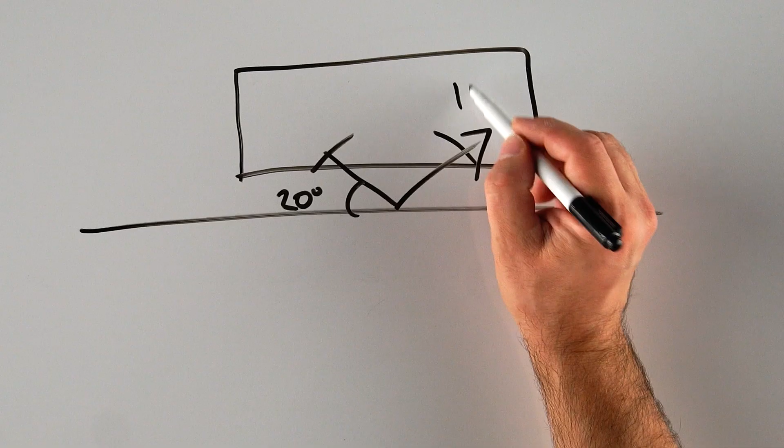If the resulting beam comes back at 20 degrees, which it won't, you've got 100 gloss units. That's perfect gloss, which you're never ever going to achieve. A new car will have 90-ish. If it's presented well and looked after well, it'll have about 90. And with a good paint correction method, you can get it up to 95. I think the most we've ever achieved is 95 or 96.

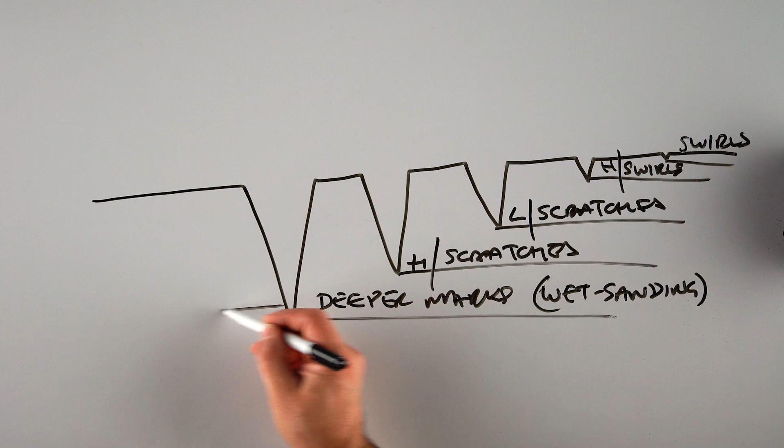Now, paintwork correction. So you've got your different levels of scratches. They're different depths. These are your swirls, these are your heavy swirls, these are your light scratches, your heavy scratches, and these are either deeper marks that require very aggressive methods to remove, such as wet sanding, or they're not removable, they're down to undercoat. If your undercoat's here and it's gone down below the undercoat, forget it. It's still worth correcting. You want to round off this edge and this edge so that it's not as noticeable.

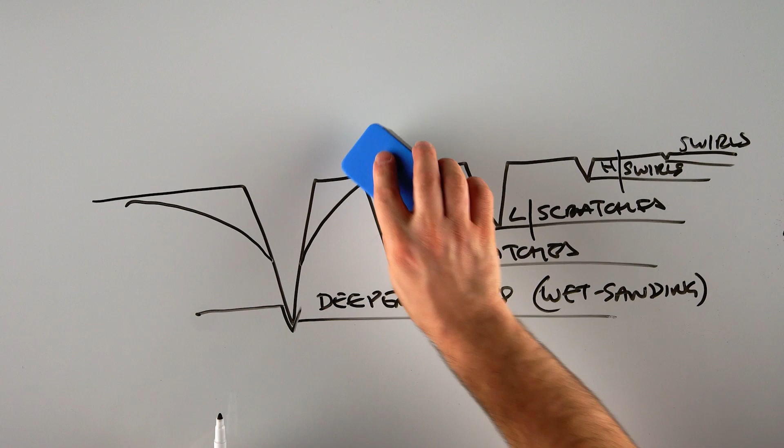And as a result, you won't see it as much and it will look better and the customer will be happy. Before you do the job, and this takes a bit of experience, you want to understand which imperfections there are and how many there are per panel. And usually they're at least consistent. So the whole car will have this type and this type, but they're generally consistent across the vehicle, unless there's a painted panel or something like that.

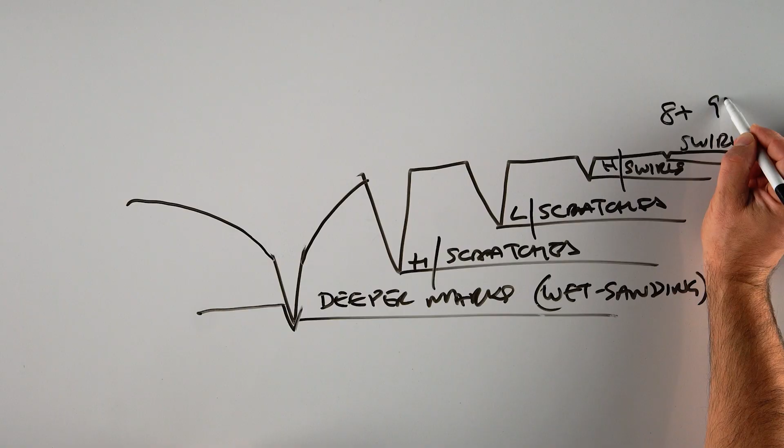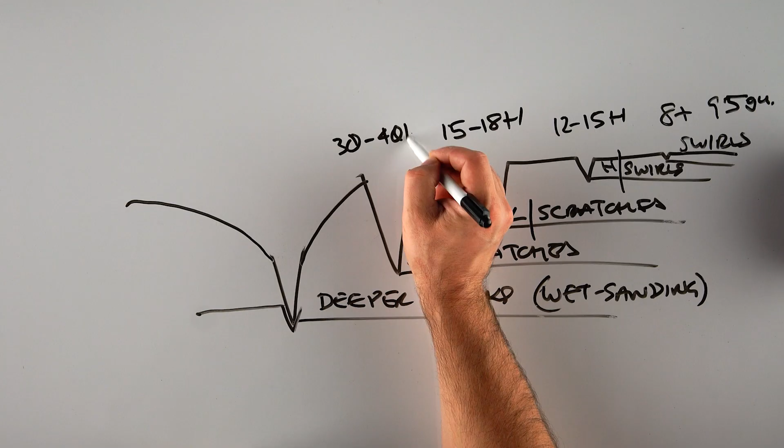Now we know that it takes just over 8 hours to remove swirls from a car properly and have a really nice 95 gloss unit finish. It takes 12 to 15 hours to remove heavy swirling and or light scratches, about 15 to 18 hours to remove light scratches, and about 30 to 40 hours to remove heavy scratches.

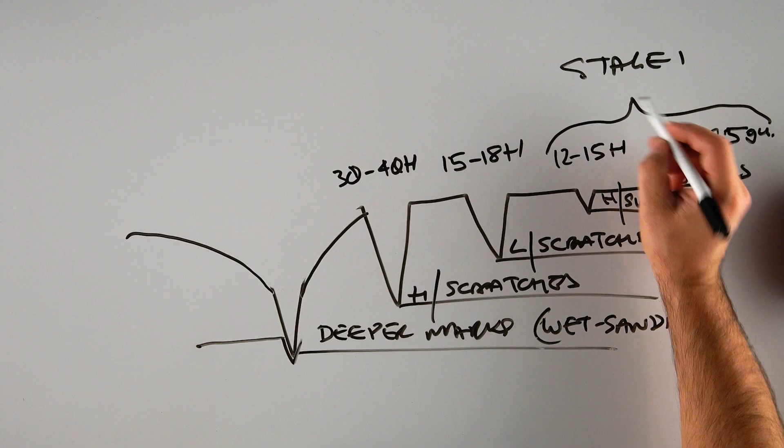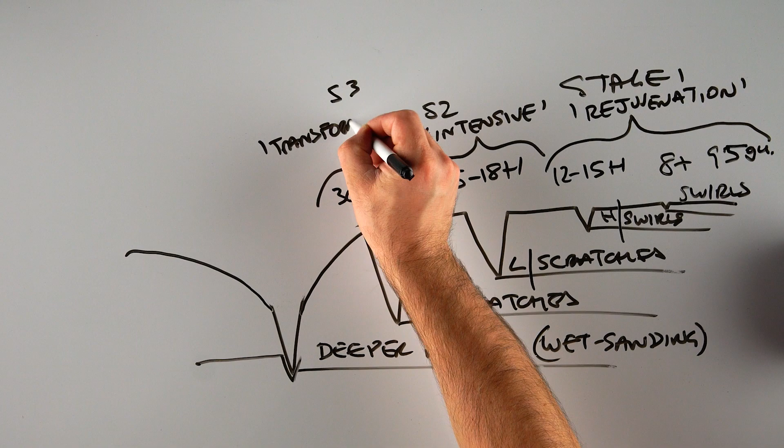This is what we'd call a stage 1 detail, and we used to call it, kind of still do, rejuvenation. This is what we'd call a stage 2 or intensive, and this is what we'd call a stage 3 or a transformation. Sorry, these are the detail services, and the paint correction is part of that and is most of that detail service. And when we say this, we mean all of this is a 95 gloss unit result. That's what we're heading for, and usually we come pretty close to it. It's always between 92 and 95 gloss units.

It doesn't matter how bad it started out, it just matters how much time you're putting into it to achieve that finish. A new car can come up to 95 gloss units, a heavily used 20-year-old work ute can come up to 95 gloss units. It just needs more time. The reason for this discrepancy is car size and paint type.

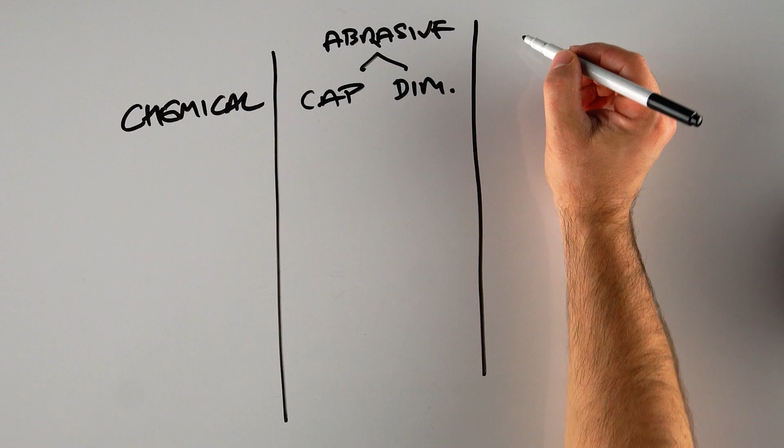Okay, now polish choice. You have chemical polishers, abrasive polishers, of which there are generally cap technology and diminishing abrasive. And you've got your glazes. You've then got hybrids, which are a mixture of all three. Chemical polishers are completely useless in my opinion. They're not permanent, they clean the surface. I don't even think they should be called a polish, but they exist, they are called polishers, look out for them.

Now glazes, and we do have one glaze, it's Dark Matter. Dark Matter is a hybrid, it has some protection in it. Not all glazes have protection. It has some abrasives in it, they're the diminishing type. It has some cleaners in it. They're very, very light. And it has what we call color charged glazes.

Now Dark Matter does its job by cleaning the surface very lightly, and then if you're using Dark Matter with a machine, the abrasives will move around. They're very, very fine abrasives. They're what you'll find in our ultra fine jeweling compound. They're the diminishing type, so they haven't got much bite to them, but they're the type to gloss up a surface significantly. That's what they're there for.

It adds some color charge glazes, so anything like red, anything that's a darker color, it will really give you that depth of color, that nice thick look and jelly look to it, and it has a little protection. Glazes, including Dark Matter, we would recommend only for show cars. They just don't have a lot of protection. Or we'd recommend them over a much more durable or higher performing protection.

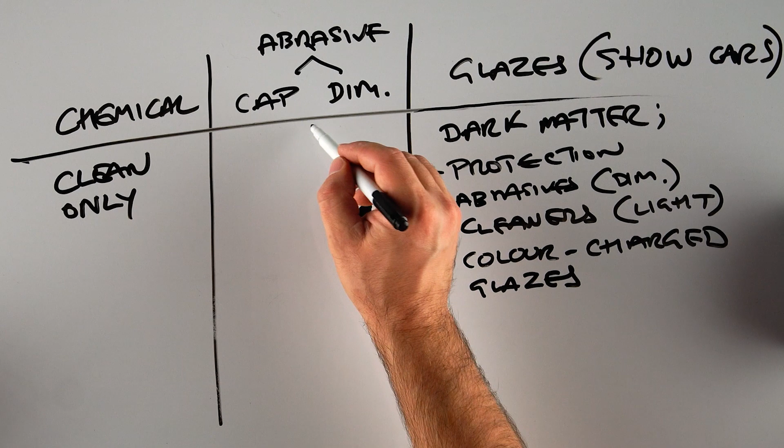Now, diminishing polishes, they can be this shape or this shape. Usually when I see them, they're this shape. The edges of the abrasive do the cutting and then they round off and they become spent after a certain amount of working time. Diminishing abrasives start cutting at whatever level they're cutting and they continue to cut at that level until they're finished.

To help you better understand the way polishes work and abrasives work, think of them like sandpaper. They're similar in the sense, except that polish has the abrasives, which are much finer, suspended in liquid instead of glued to a sheet of paper. And instead of rubbing that paper along the surface, you're applying it to a buffing pad and agitating it.

Diminishing abrasives are a lot like sandpaper in that sense. They have a grit level, P6000 equivalent or something like that, and they will cut and finish at that level and only that level. Now your cap polishes or clustered abrasive polish will have abrasives that are clustered in groups. They kind of huddle together.

These act as one big abrasive, which can be anywhere between 2 to 5 times the size of your diminishing abrasives. They then break down into smaller particles, similar in size to the diminishing particles. So they don't behave like a sandpaper. They may start cutting at a P2000 grit level and finish up at a P4000 grit.

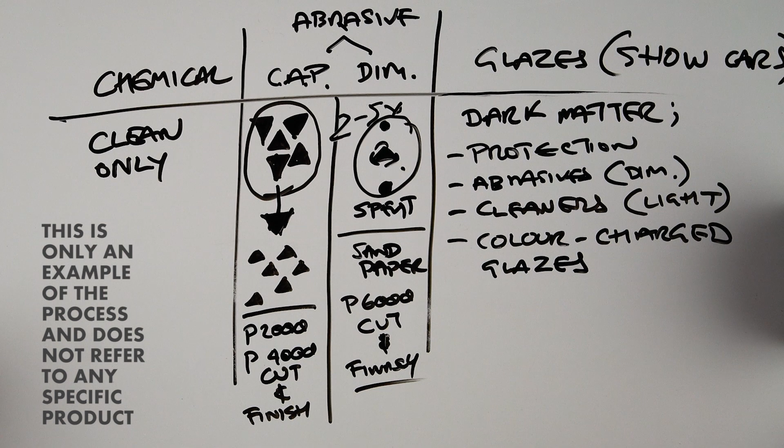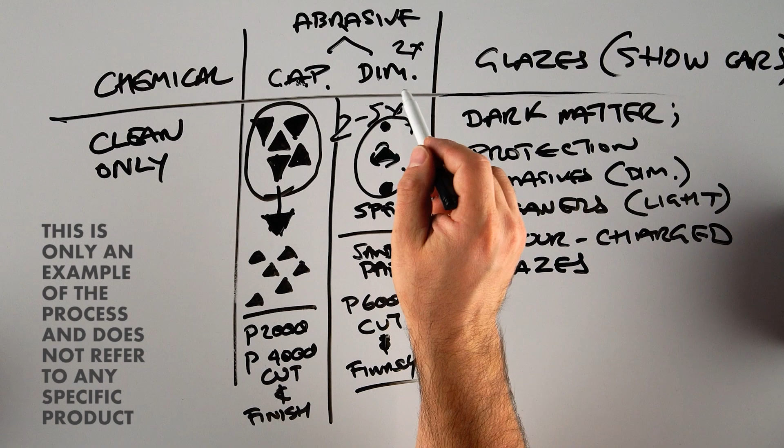Being able to cut at one level and refine down to another level is hugely efficient. The cost saving and the amount of extra correction you can do in any given time is significantly greater than the diminishing abrasive. This technology, in my opinion, is worth twice the price of the diminishing abrasive. I wouldn't even bother to use diminishing abrasive now that this technology exists.

Also with your polishes, some abrasives are soft and some abrasives are hard. Hard abrasives are an issue when you have some dusting and you have some abrasives that have been ejected from the pad and they're sitting on top of the surface.

If you've ever removed polish from soft paint and you've noticed that the cloth has marred it, you've grabbed another cloth and you've tried different cloths and you're sure that cloth is clean and soft and it keeps marring, or you've got that surface fine and you've wiped it and it looks fine, but then on another panel you've wiped it again and you start to see some marring, that could be, and most likely is, hard abrasives. And you want to switch to a polish with soft abrasives, especially if you're polishing soft paintwork.

Another issue with usually cheap polishes is softening, chemical softening. When you remove those imperfections, they're only partially removed. It looks completely removed, but some of that is temporary. What's happening here is the chemical is softening the paint. The abrasives are doing much more cutting because the paint's much softer, and then there's some suck back.

When you get that suck back, some of those imperfections come back, and it is the absolute most inefficient way to polish. It costs an absolute fortune. You have to go around the car, then come back and go around the car again. If you're using that same polish to go around the car again, you might even have to do it a third time. Now, pad choice.

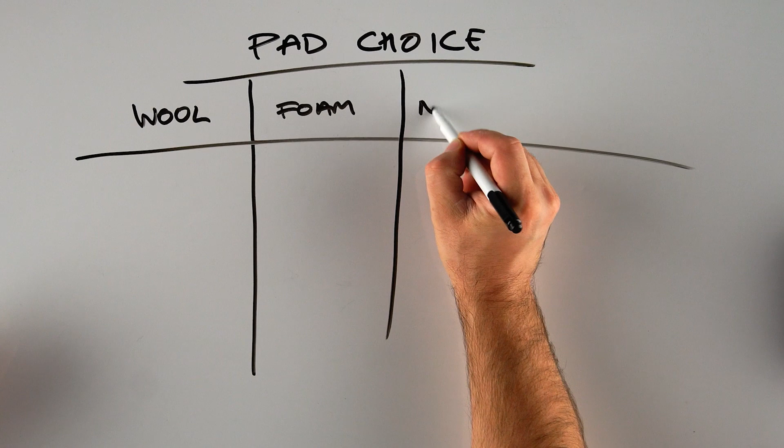We will soon be offering an extended range of pads. We'll start at wool, which is new for us, foam, nanofiber or microfiber, and orange peel reduction, or OPR for short. Now each pad has its own characteristics and offers its own level of cut and finish.

I've listed these three from the heaviest cutting to the finest, but you don't necessarily choose them for that one characteristic. There's a bunch of characteristics they have, and you'd make that choice based on the application. Whatever that paint type and the imperfections that are in that paint calls for, that's what you would choose. And you would choose a pad that works well with your polish. They have to work well together with your polish. We do a lot of testing to make sure our polishes are compatible with these material types.

Now, there are pros and cons to each. The pro to wool is very fast cutting. The con to wool is low gloss in general. Another pro is low temp levels in general. They clean very efficiently, they wash clean very quickly, and they dry very, very quickly.

They can be dirty. They tend to drop fibers more than nanofiber, and foam, if you look after foam, is very, very clean. Some people, I haven't come across many, but I did come across two who are just allergic to wool, which is a bummer. We'll have wool pads soon, and they're exciting.

The old school wool pads had fibers with little hooks on them, and just recently Australian Wool has come through with a technology where they deburr the hooks off it, so it's just nice clean fibre, and this is what's transformed a fibre that is completely useless for detailing and something we haven't used since the 90s and only on the cheapest cars, to something that we're absolutely going to use very, very soon, as we're finished with testing.

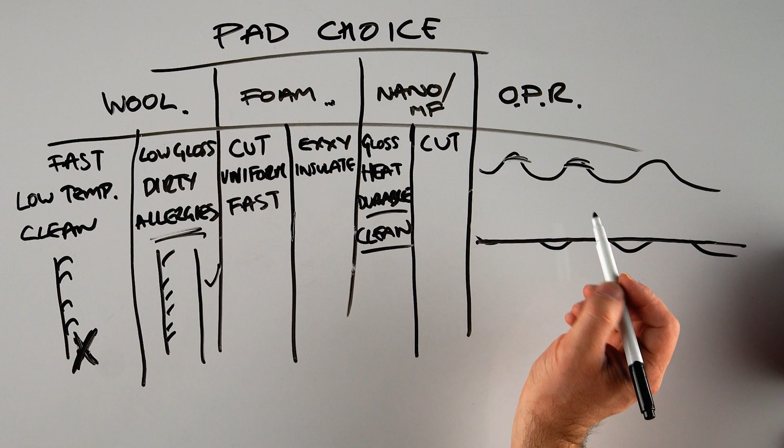What the OPR pad does is it just kind of knocks the tops off a little bit gradually. Then you can have a look at your peel, and you can start to take it off and start to taper and taper and taper until you get the amount of peel, and you still have peel, but the amount of peel that you want to match other panels. Or if you just simply wanted to reduce the peel a bit, but you still wanted some peel.

Peel is not an issue or a side effect of bad painting or anything. Peel is dialed in by manufacturers, and peel looks nice and it suits certain shapes and colors and things. These finishes are subjective. You can have one or the other. You either like this or you like that, and there are pros and cons to each.

Okay, machine choice. People spend forever talking about which machine they're going to use, and it is important, I get it. We agree it's important, so important we're going to release a whole range of machines soon.

Okay, rotary. This is still just my favourite. There's something about a rotary polisher that just still wins, and unfortunately it requires huge skill. I've said it before, but I'll mention it because it's really appropriate for this video. The rotary polisher unfortunately requires a lot of skill, but fortunately gives you all the feedback. It teaches you to be a good detailer. It will give you the most amount of accessory options.

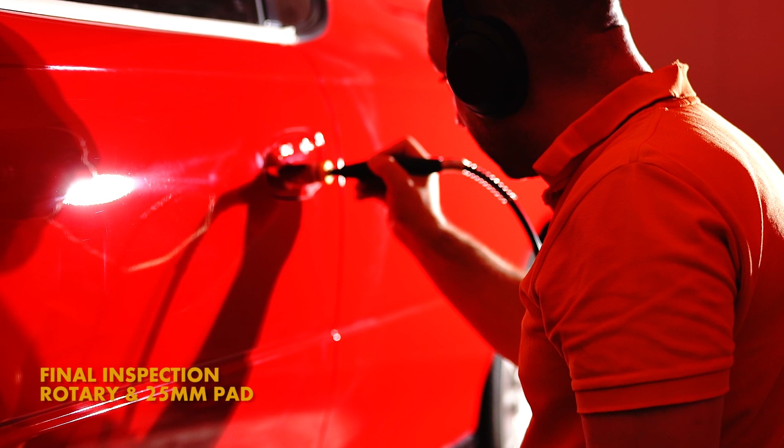It is the tool for a professional detailer, and if you're a professional detailer and don't own a rotary polisher, you must get one. You can own these too, they're good and they're getting better all the time, but you really do have to have a rotary polisher and learn to use it. It will make your jobs faster. Yes, it has more risk, but these are also risky, especially these big ones.

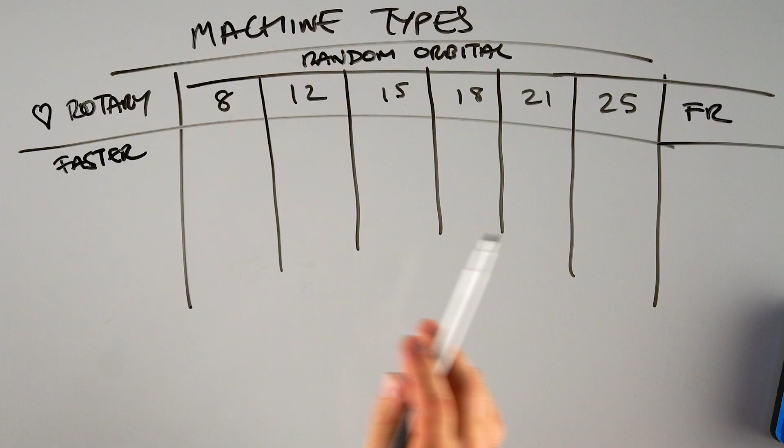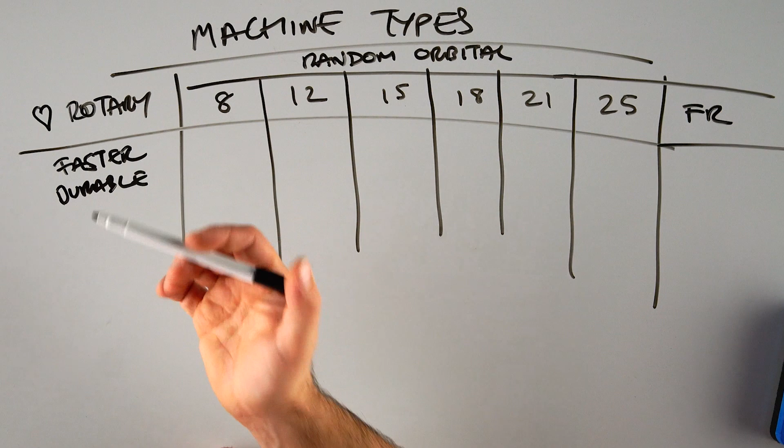A lot of people are using 21mm throw random orbits. They're actually quite risky. Not much less risky than a rotary polisher, and if you really learn to use a rotary polisher properly, it's as risky as a long throw random orbit. Get a rotary polisher. Rotary polishers are durable. They're simple machines. A simpler machine is just going to be more durable.

They have more power. Now this translates to it being faster sometimes, but it also translates to a smoother rotation, which in turn yields a better finish. If the machine's not bogging down, or it's not catching, or it's just simply smoother, it's going to give you a nicer finish. They're usually lighter and more compact. The rotary polisher we're working on is much lighter and much more compact than a long throw, and it's going to last longer and it's going to be a little cheaper.

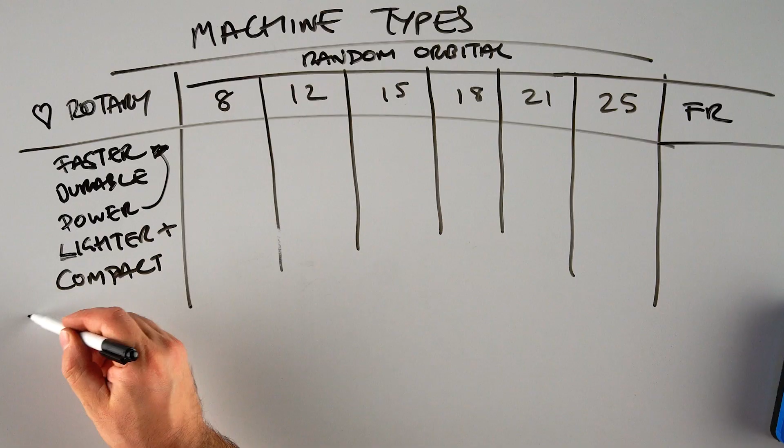Also, and this is a big one, finish quality. On some paints, and yes it is very few, the Ferrari F40 that we do at least once every 2 years is a perfect example of this. It finishes up best. Statistically we get the most gloss out of that paintwork when we use a rotary to finish. If we use any one of these type of machines, we get less gloss than with a rotary. We've tried every different pad type, every different pad and polish combination. If we use a rotary, we just simply get more gloss, we get a better finish.

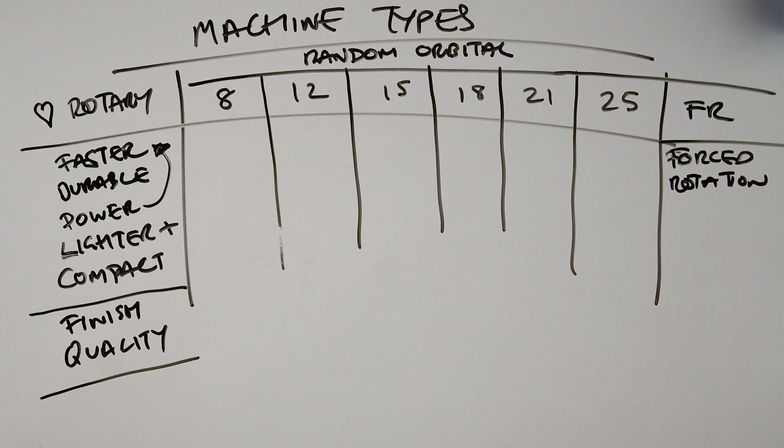Now there's forced rotation. If I'm correct, forced rotation is a technology owned by Festool, and I think they allow Bosch to use it. I could be wrong, I'm not going to go too much into that. I definitely don't want to mislead people if that's not the case. Forced rotation is slightly different to the way a random orbit works.

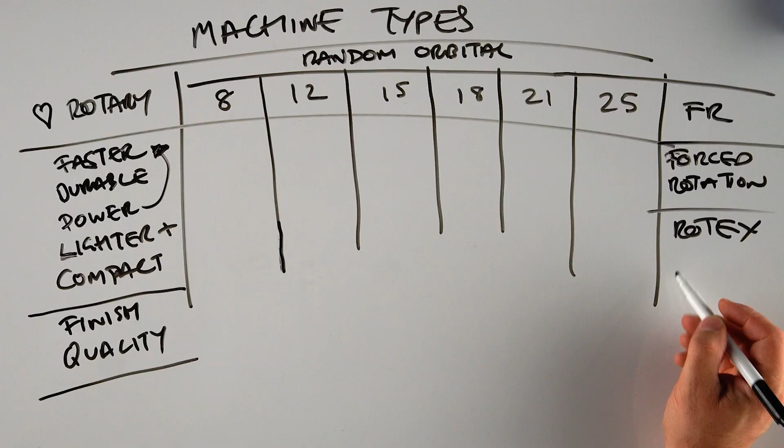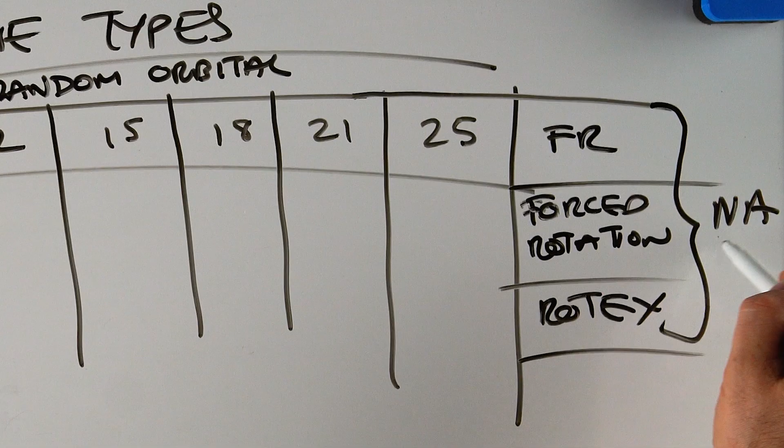The machines we used to use were called Rotex. We no longer use our Festool Rotex anymore. They were great for a good 15-year period. We used nothing but Rotex for a specific type of work. They didn't get much use, but when they were called in for duty, they just had this bright niche that only the forced rotation machines could do, but they're no longer necessary, and I wouldn't recommend them for detailing use anymore. Quite expensive too. Great for sanding, no longer required for detailing in my opinion.

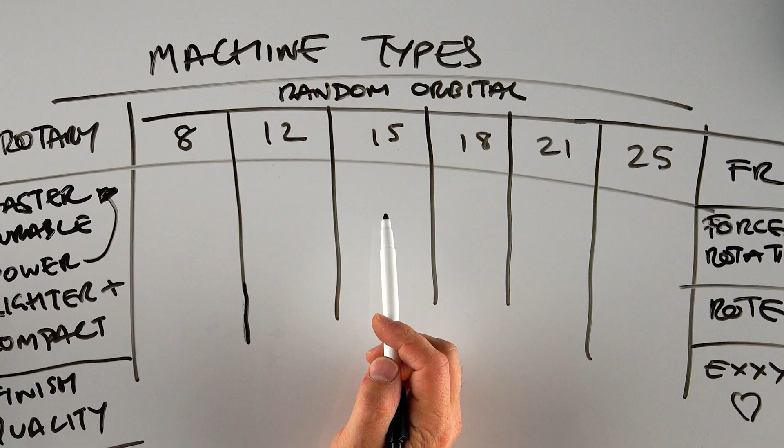Okay, now random orbit, which is what most enthusiasts are using, and most professional detailers have at least one. Everybody seems to think that the longer the throw, the better the machine is, but that's not the case. The longer the throw, the more risky the machine is.

The longer the throw, the less detailed work you can do. If this is your backing plate, but it's going to come out to here, let's say the longest throw that we have, 25mm, and you're polishing a rounded door handle. With a rotary polisher, and this is one of the pros, this line here, the top of the pad, is going to continue on, and you can get a very, very straight edge with a rotary polisher.

And you can also do this type of work with an 8mm orbit machine like the Velvet Revolver. It's perfectly suited to this kind of work. You can get close enough, and the Velvet Revolver is clutched, and it's a very, very forgiving machine, so as long as you've masked this section, you're able to go right up to that door handle and buff along it.

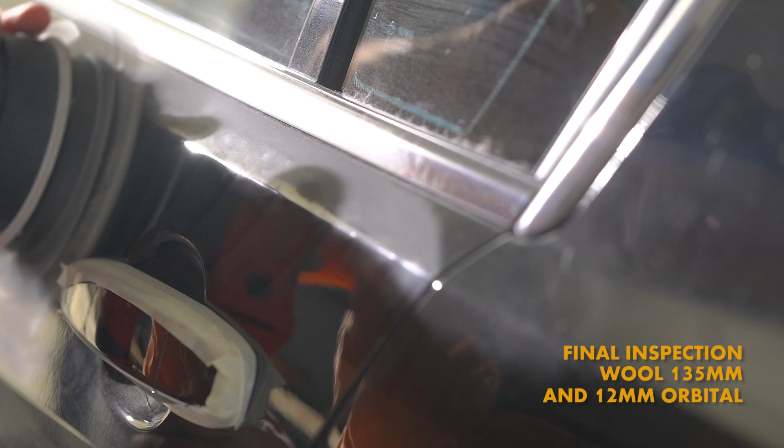You cannot do that with a 25 or 21 or even an 18mm machine. It will just smash into that door handle every time, and there's the risk of the backing plate hitting it, or as that pad moves up, it'll just dig into that section, and you've got the edge of the foam, which is the unlubricated edge, rubbing against that door handle. It's just not the way to do a job.

If you've only got one machine and it's a long throw machine, there's a lot of the car that you're not going to get done properly, and that's not detailing. Detailing is detailing all the little details. You have to get in all the little nooks and crannies, so you really need one of these first before you get one of these. If you want all of them, that's great if you've got the budget. If you want one of them, get the 8mm first. Don't go to the big throw machine and think, well, that'll do everything.

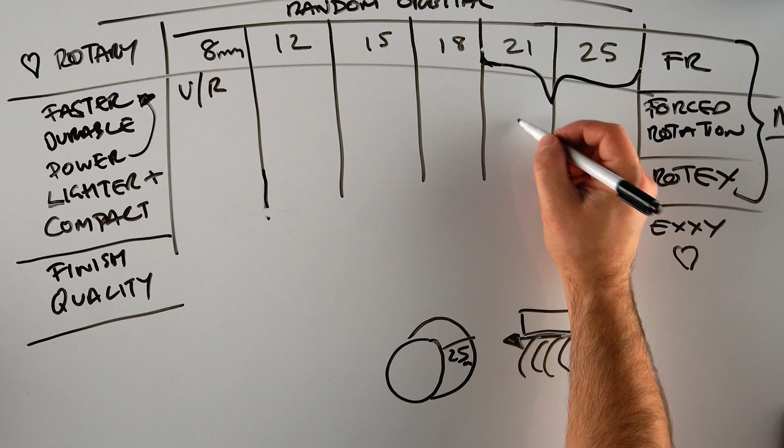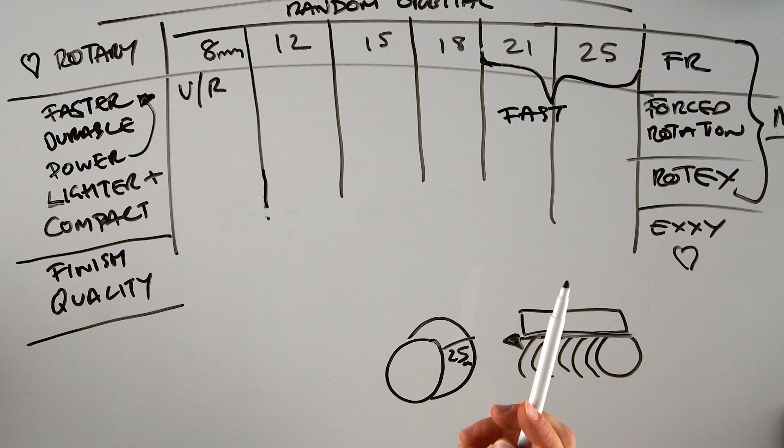Pros for the big boys, the really long throw, is they're fast, got fast action. They can usually spin big pads and cover a large area very quickly, and they've got that really aggressive action that comes along with that big throw, so you get a lot of cutting power very quickly. These are slightly risky, but they don't require the skill of a rotary, and you'll get much more gloss more easily than you will if you're a low-skilled rotary user. So if you've ever used a rotary machine and you say it just doesn't deliver a good finish, it's not the machine, it's your skill level. But that's fine. If your skill level's low, that might be the machine for you.

Now, we've been using our 21 and 25mm machines over the last year and a bit as much as we've used our 8mm machines. The 12, 15 and 18 don't get used very much at all, but they do come in really handy, especially the 15. The 15mm I just find has a certain type of finish and look to it. It's a very good one-stepper machine. The 15mm with a nanofiber pad, which we used on that car, just saved a bit of time. If you didn't have very deep imperfections and that section didn't have to be perfect, you could hit it with the 15mm nanofiber pad and it would give you a very quick one-step action.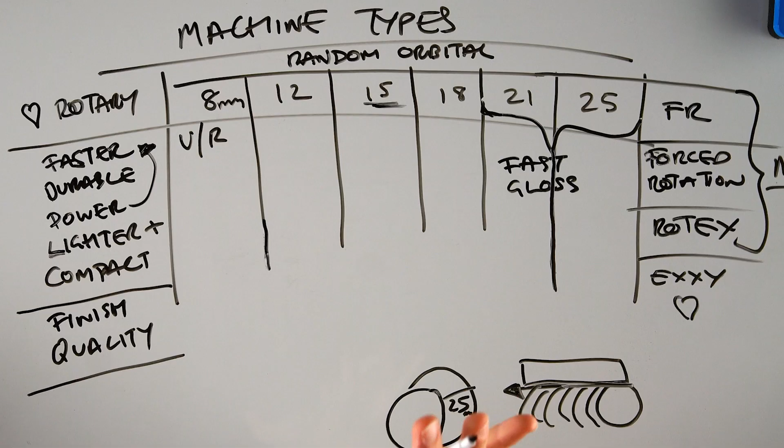Also, because it had a nanofiber pad and because it was only 15mm, which is quite a bit of throw but not huge, it was actually forgiving on the surface. There wasn't a lot of heat. There was just enough cutting power, just enough gloss. Really good one-step by the 15mm. And 12 and 18 are obviously either side of that, and you might find that you like those. On the 12 I like a slightly smaller pad, maybe a 125mm pad, around 15 to 18 I'm at 135 or 150mm, and 21 and 25 always 150mm pads.

Hope that helps you understand machine types. We'll probably come back and talk a little bit about the machines in separate videos for each machine type as our machine range is released.

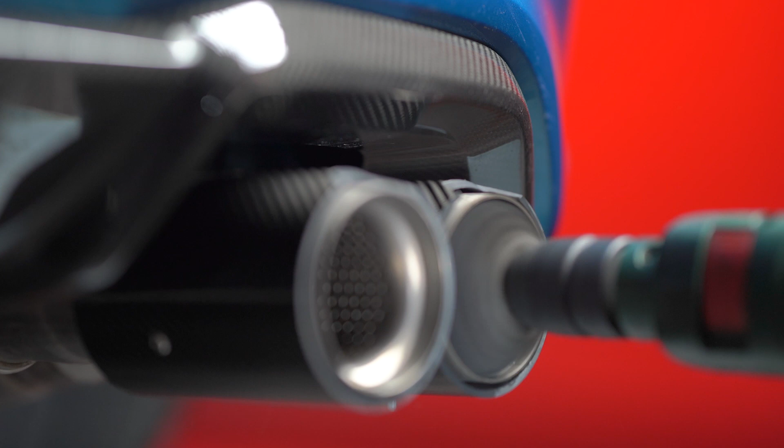Another machine choice, and we do use it not very often, is a drill. A conventional drill is so useful. You've got to have one. We use one with a clutching mechanism, and we attach polishing balls to it, and we do the inside of exhausts and a whole range of different things. They just sometimes get into places, or they're just the most suitable solution for that particular area of the car. Good to have. You've got to have one anyway. Use it for detailing with the appropriate tool for the right application.

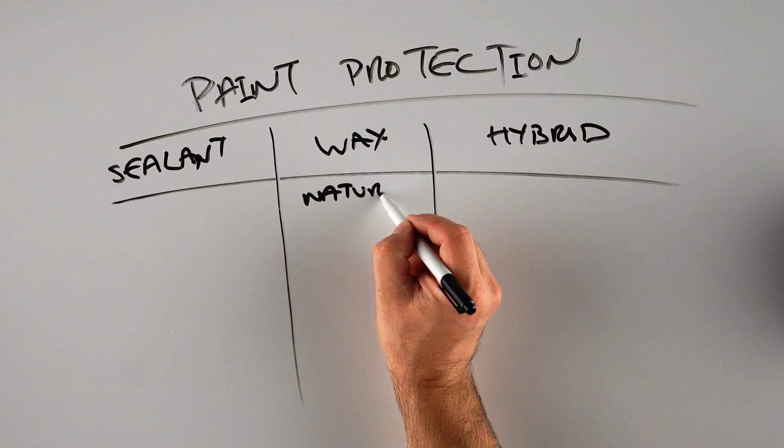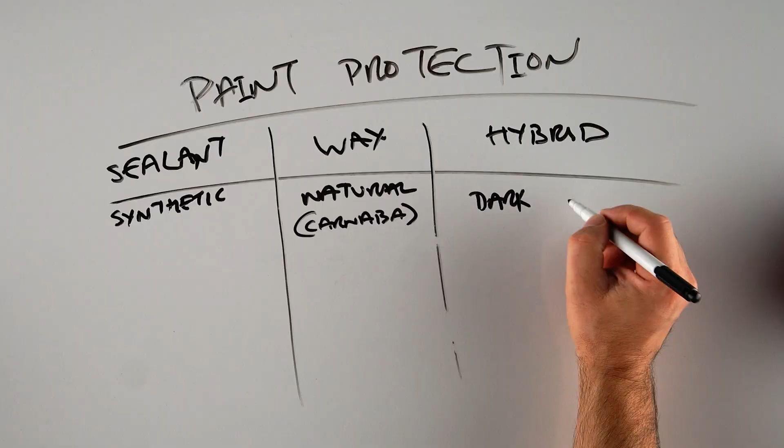Okay, now we wrap it up with paint protection. You've got your three types: sealant, wax and hybrid. Sealant and waxes are essentially the same thing, but this one's natural. It's usually a Carnauba. This one is synthetic, and hybrid is as you assumed, and our hybrid protection is Dark Matter. As we mentioned before, it is a polish. It does contain abrasives, but it also contains protection, so it is a form of paint protection.

And it is either a synthetic base with an emulsified wax in it, or vice versa, depending how you want to see it. I've heard one customer call it a Carnauba wax with a synthetic fortifier. I like that. So he gets the look of a Carnauba wax, but he gets the durability of a synthetic sealant. That's not necessarily the case. This is a compromise between these two. So it probably shouldn't look as good as a wax. I think it looks better, but that's for other reasons, because of the glazes, the color charging in it. It definitely doesn't perform like a sealant. You don't get the longevity, you don't get the contact angle of a sealant.

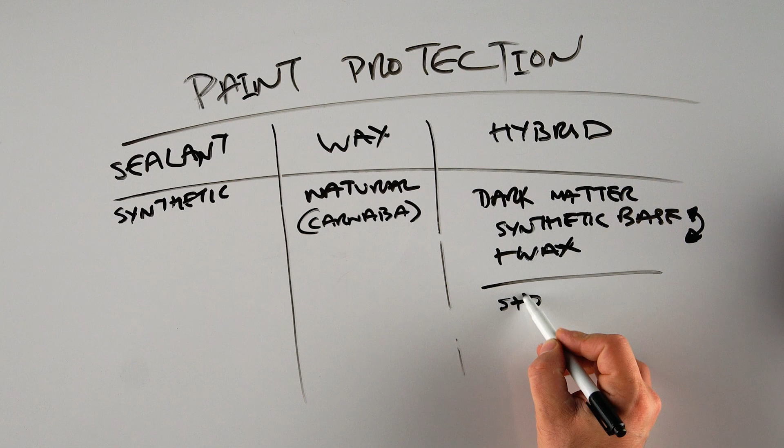This is something that you would use for show cars or cars that get very, very little use. Definitely we've got it on cars that we use and are driven in the rain, etc., but those cars may see a few thousand kilometers a year. That's the type of paint protection that's suitable for them. Wax, I find no use for wax anymore. It's just an old technology that I just don't like anymore. We had the most expensive waxes, $18,000 a tub. I won't mention the brand. They were great back then. We still held on to them for a while.

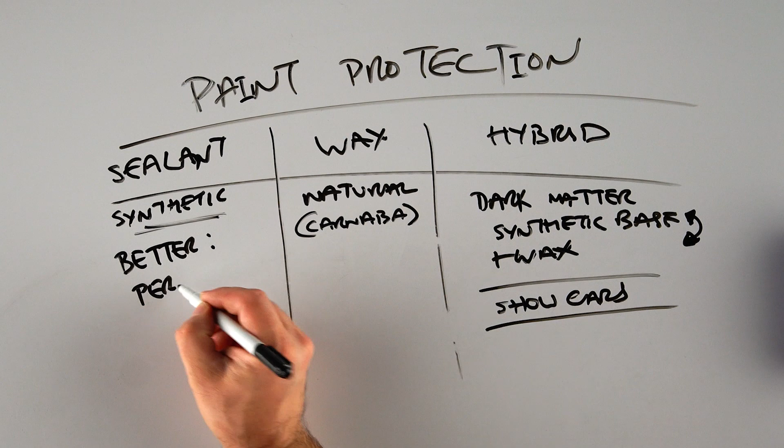I was still using them for a while after synthetics had taken over, because I guess it's like an internal combustion engine thing. An electric car is the future. It is better, but there's some emotion attached to a wax. And I still have some emotive attachment to waxes, but I just simply wouldn't put it on a car that required the best paint protection. You'd go for a synthetic. This wins in every single category. It performs better, it outlasts it, higher contact angles, better washing, more scratch resistance, the whole lot. And it's usually cheaper per, say, month of protection than a wax. They may cost more than a wax, but they're cheaper long term.